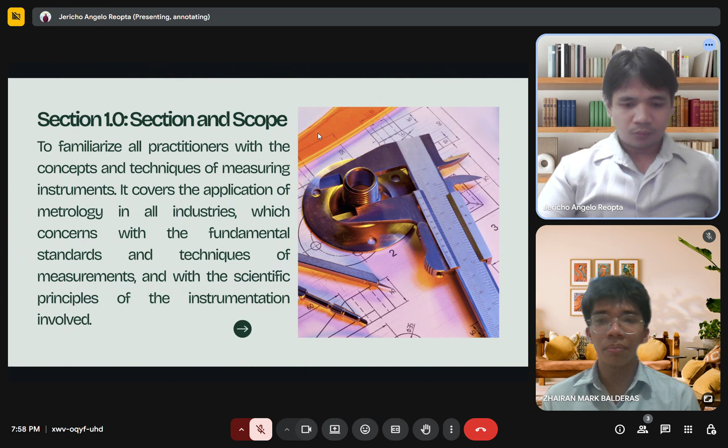First is Section 1, Scope. To familiarize all practitioners with the concept and techniques of measuring instruments, it covers the application of metrology in all industries concerned with the fundamental standards and techniques of measurements and with the scientific principles of the instrumentation involved.

Section 2, Definitions. Correctness or accuracy: the degree of conformity of a measured or calculated value to some recognized standard or specified value. The difference between the measured and true value is the error of the measurement.

Precision is the repeatability of the measuring process, or how well identically performed measurements agree. This concept applies to a set of measurements.

Tolerance or allowance. Tolerance is the amount of variation permitted in the part, or the total variation allowed in a given dimension, while allowance is the minimum clearance space intended between mating parts and represents the condition of the tightest possible fit.

Standard: something that is set up and established by authority as a rule for the measure of a quantity, weight, extent, value, or quality.

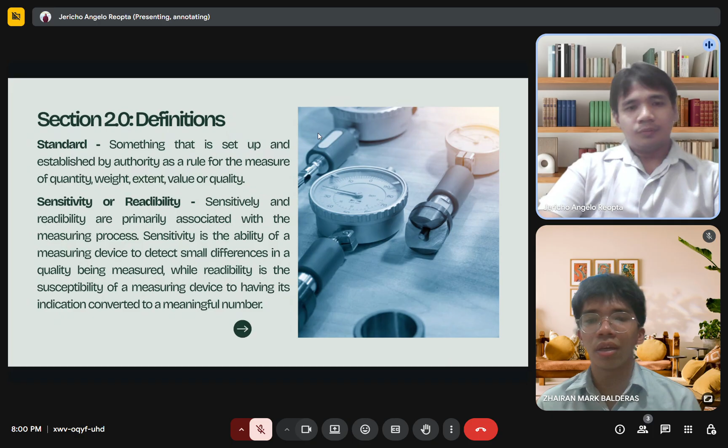Sensitivity or readability. Sensitivity and readability are primarily associated with the measuring process. Sensitivity is the ability of a measuring device to detect small differences in a quantity being measured, while readability is the susceptibility of a measuring device to have its indication converted to a meaningful measured number.

Section 3, Measurement Concepts. The International System of Units, or the SI standard unit, the Conference Generale des Poids et Mesures,

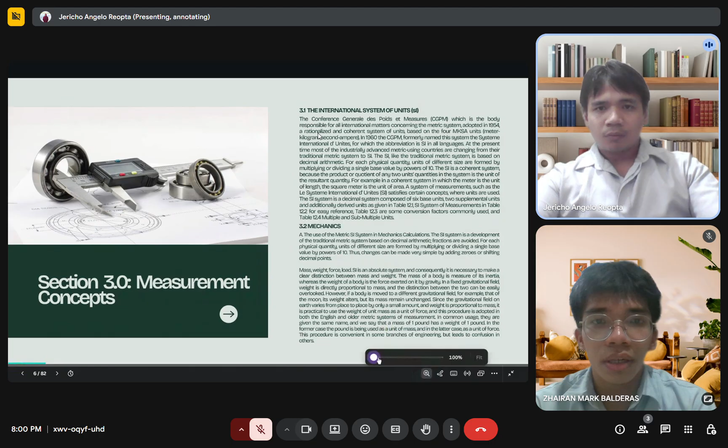or CGPM, is the body responsible for all international matters concerning the metric system. It adopted in 1954 a rationalized and coherent system of units based on the 4 MKSA units: meter, kilogram, second, ampere.

In 1960, the CGPM formally named this system the System International of Units, for which the abbreviation is SI in all languages. At present, most industrially advanced metric-using countries are changing from their traditional metric system to SI.

The SI, like the traditional metric system, is based on decimal arithmetic. For each physical quantity, units of different size are formed by multiplying or dividing the single base value by powers of 10. The SI is a coherent system because the product or quotient of any two unit quantities in the system

is the unit of the resultant quantity. For example, in a coherent system in which the meter is the unit of length, the square meter is the unit of area.

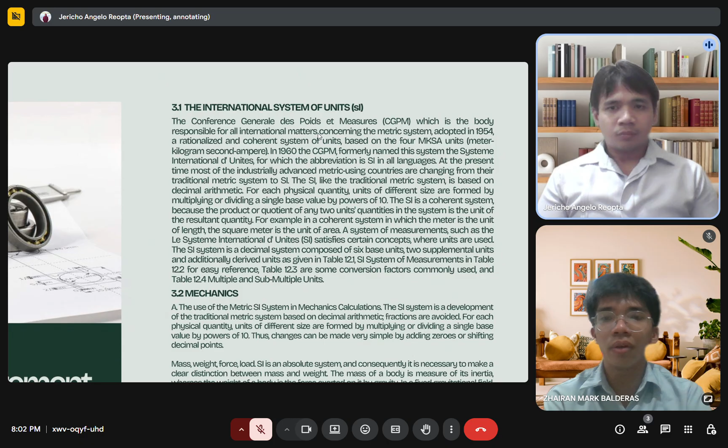In Table 12.2, for easy reference, Table 12.3 shows some conversion factors commonly used, and Table 12.4 shows multiple and sub-multiple units.

Mechanics: the use of the metric SI system in mechanics calculations. The SI system is developed from the traditional metric system based on decimal arithmetic.

Fractions are avoided. For each physical quantity, units of different size are formed by multiplying or dividing a single base value by powers of 10. Thus, changes can be made very simply by adding zeros or shifting decimal points.

Mass, weight, force, load: SI is an absolute system, and consequently it is necessary to make a clear distinction between mass and weight. The mass of a body is a measure of its inertia, whereas the weight of a body is the force exerted on it by gravity.

In a fixed gravitational field, however, if a body is moved to a different gravitational field, for example that of the moon, its weight alters but its mass must remain unchanged.

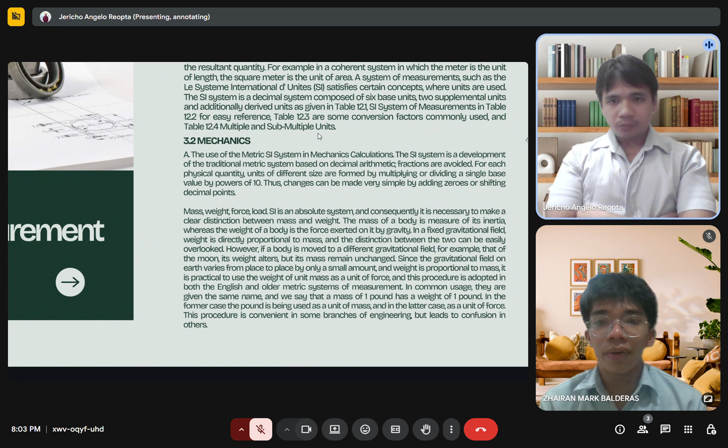Since the gravitational field on Earth varies from place to place by only a small amount, and weight is proportional to mass, it is practical to use the weight of unit mass as a unit of force.

This procedure is adopted in both the English and older metric systems of measurement. In common usage, they are given the same name, and we say the mass of 1 pound has a weight of 1 pound. In the former case, the pound is used as a unit of mass, and in the latter case as a unit of force.

This procedure is convenient in some branches of engineering but leads to confusion in others.

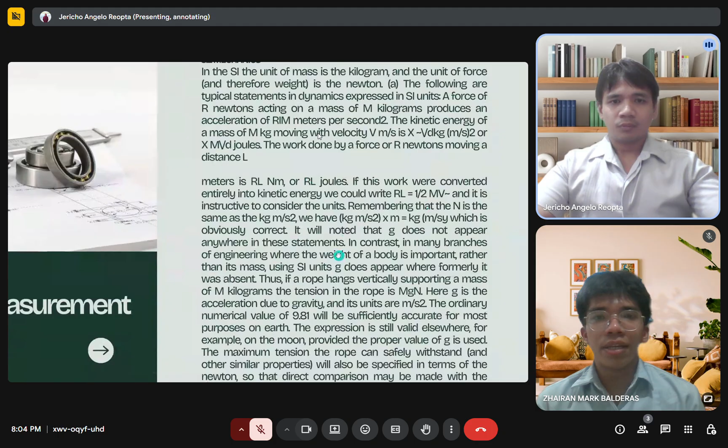In the SI, the unit of mass is the kilogram and the unit of force, and therefore weight, is the newton. The following are typical statements in dynamics expressed in SI units. A force of R newtons acting on a mass of m kilograms produces an acceleration of R/m meters per second squared. The kinetic energy of a mass of m kilograms moving with velocity v meters per second is 1/2 mv² kilogram square meters per second squared, or 1/2 mv² joules.

The work done by a force of R newtons moving through a distance L meters is RL newton meters, or RL joules. If this work were converted entirely into kinetic energy, we would write RL = 1/2 mv², and it is instructive to consider the units, remembering that the N is the same as kilogram meter per second squared. We have kilogram meter per second squared multiplied by meters equal to kilogram multiplied by meters squared over seconds squared, which is obviously correct.

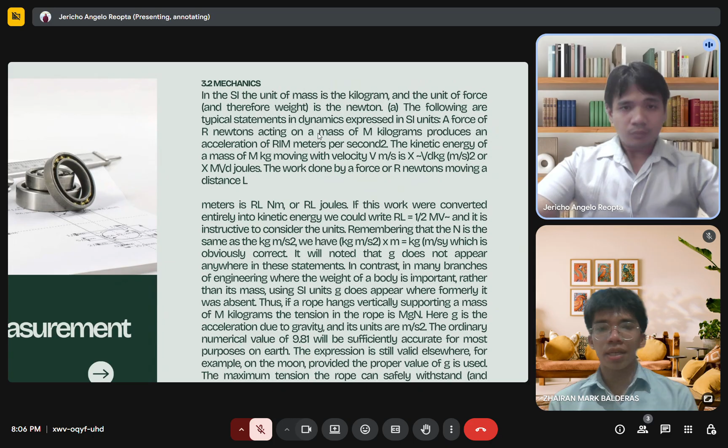It will be noted that g does not appear anywhere in this statement. In contrast, in many branches of engineering where the weight of a body is important rather than its mass, using SI units, g does appear where formerly it was absent. Thus, if a rope hangs vertically supporting a mass of m kilograms, the tension in the rope is mg newtons, where g is the acceleration due to gravity and its units are meters per second squared. Ordinarily the numerical value of 9.81 will be sufficient for most purposes.

The expression is still valid elsewhere, for example on the moon, provided the proper value of g is used. The maximum tension the rope can safely withstand, and other similar properties, will also be specified in terms of the newton, so that direct comparison may be made with the tension predicted. Next.

Pressure and stress: these quantities are expressed in terms of force per unit area. In the SI, the unit is based on the newton per square meter. Similarly, data used in strength of materials calculations, Young's modulus of elasticity, yield strength, and so on, are all expressed in terms of the newton. It has been recommended by the International Standards Organization that the special name be the pascal. This recommendation is subject to approval by the CGPM. The basic unit is the newton per square meter. It's very small; it is only 0.15 multiplied by 10⁻³ pound per square inch.

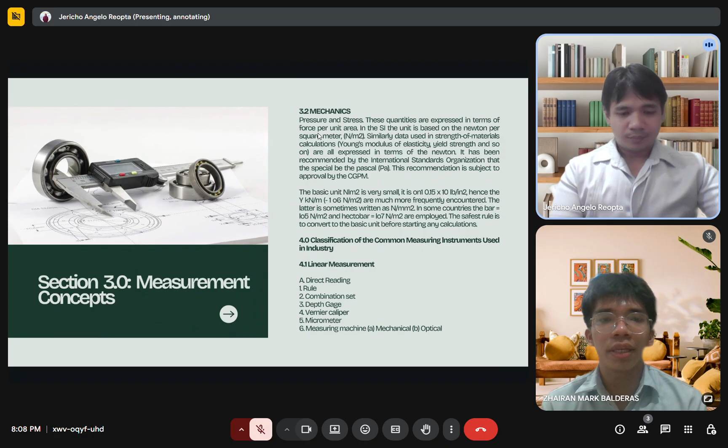Hence, the kilonewton per square meter and meganewton per square meter are much more frequently encountered, the latter sometimes written as newton per square millimeter. In some countries, the bar, 10⁵ newtons per square meter, and hectobar, 10⁷ newtons per square meter, are employed. The safest rule is to convert to the basic unit before starting any calculations.

4.0 Classifications of the common measuring instruments used in the industry. The first one is linear measurement, direct reading: 1 is the rule, 2 is the combination set, 3 is the depth gauge, 4 is the vernier caliper, 5 is the micrometer, and lastly, the measuring machine, mechanical and optical.

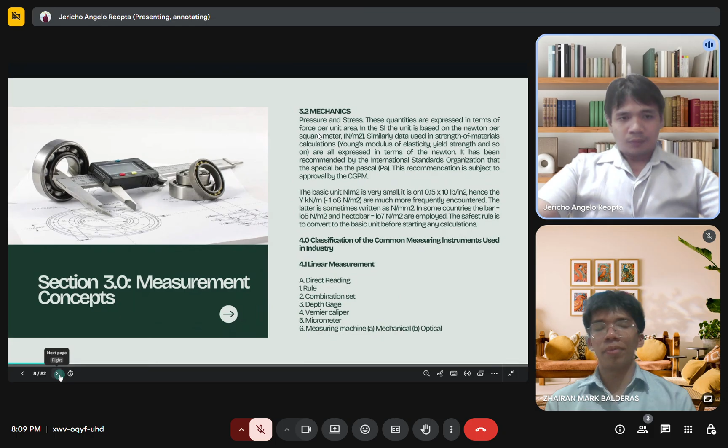Section 5, the graduated manual measuring tools. Rules: the most generally used graduated measuring instrument in the industrial metrology field for approximately determining linear dimensions, which are made with various dimensions and accuracies. Rules shall be manufactured of carbon steel or stainless steel. Shrink rules are commonly employed in the pattern making trade where the casting of metals is involved, and automatically take into consideration the shrink allowances of the materials being cast.

Hook rule, frequently used to assure the user that the end of the workpiece is flush with the end of the rule. Tapered rules are used in measuring the inside of small holes, narrow slots, and grooves. Next is the calipers. Slide calipers consist of a stationary jaw integral with the graduated beam on which the movable jaw slides, with reference points for inside and outside readings. Next one is the vernier calipers, a measuring instrument which can be used for taking both inside and outside, and dial calipers, direct reading calipers which are accurate up to the thousandth of a centimeter.

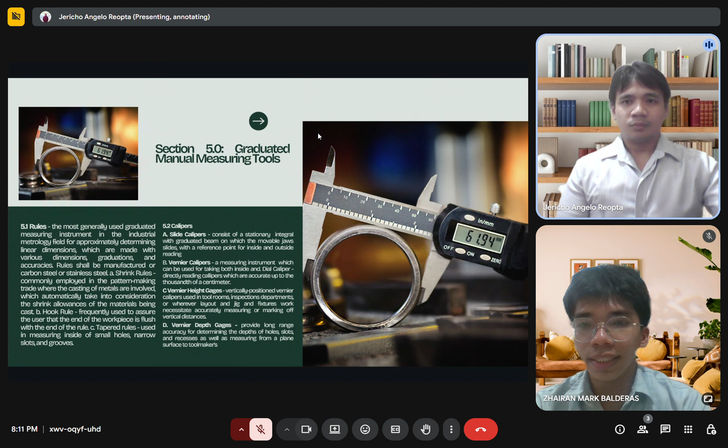The next one is the vernier height gauge: vertically positioned vernier calipers used in tool rooms, inspection departments, or where layout and jig and fixture work necessitate accurately measuring or marking vertical distances. Next is the vernier depth gauge, which provides long-range accuracy for determining the depth of holes, slots, and recesses, as well as measuring from a plane surface, for toolmakers. Next.

Gear tooth vernier calipers are used to check the pitch line thickness of gear teeth by measuring the tooth chord at the specific distance, the chordal addendum, from the top of the gear tooth.

The gauge consists of two independently actuated vernier calipers, each having its own movable slide, but the beams and the stationary jaw are made of a common single piece. One of the slides has the form of a blade called the tongue of the instrument, which contacts the top of the gear tooth. By moving this slide, the gauge can be adjusted to operate at the desired addendum distance. The second slide, integral with the movable jaw, carries out the actual chordal thickness measurement at the pitch line.

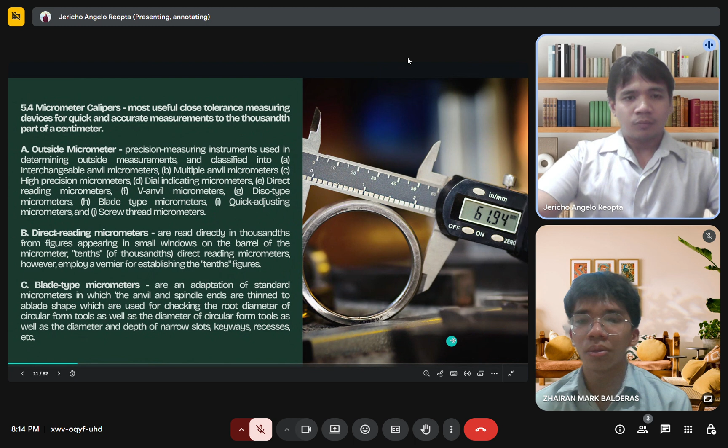Direct reading micrometers are read directly in thousandths from figures appearing in a small window on the barrel of the micrometer. Ten-thousandths direct reading micrometers, however, employ a vernier for establishing the tenths figures. The next one is the blade type micrometers. These are an adaptation of standard micrometers in which the anvil and spindle ends are thinned to a blade shape, which are used for checking the root diameter of circular form tools as well as the diameter and depth of narrow slots, keyways, recesses, etc.

Next is the quick adjusting micrometers that allow the spindle to be slid quickly to any point within their range, which makes them particularly efficient thousandth reading micrometers for checking work where a variety of dimensions are involved. Next is the screw thread micrometers. Screw thread micrometers are designed to read the pitch diameter of screws to thousandth accuracy by the use of a pointed spindle and double V anvil, which are available for varying diameters of work, and each size normally covers a range of threads per centimeter.

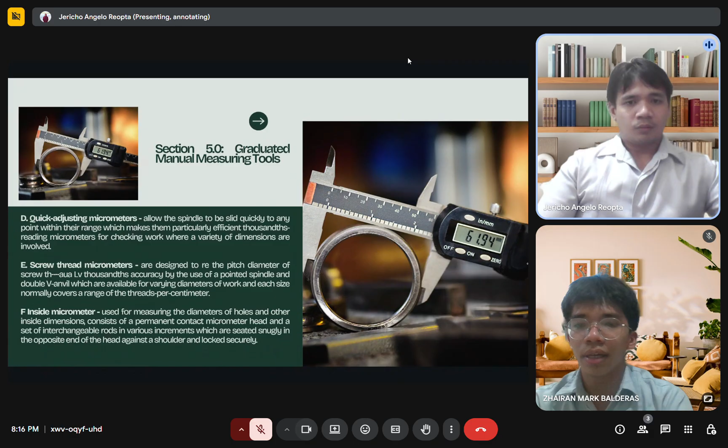Next is the inside micrometer, used for measuring the diameters of holes and other inside dimensions. It consists of a permanent contact micrometer head and a set of interchangeable rods in various increments, which are seated snugly in the opposite end of the head against a shoulder and locked securely. Next,

the protractor consists of a rectangular head graduated in degrees along a semicircle with a blade pivoted on the center pin. Any angle from 0 to 180 can be set. The combination protractor and depth gauge is a combination of a movable graduated blade depth gauge and a graduated protractor head.

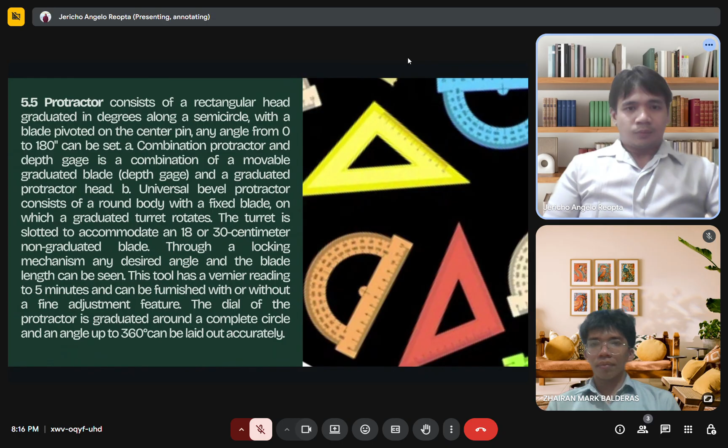The universal bevel protractor consists of a round body with a fixed blade on which a graduated turret rotates. The turret is slotted to accommodate an 18 or 30 centimeter non-graduated blade. Through a locking mechanism, the desired angle and the blade length can be set. This tool has a vernier reading to 5 minutes and can be furnished with or without a fine adjustment feature. The dial of the protractor is graduated around a complete circle, and an angle of 360 can be laid out accurately.

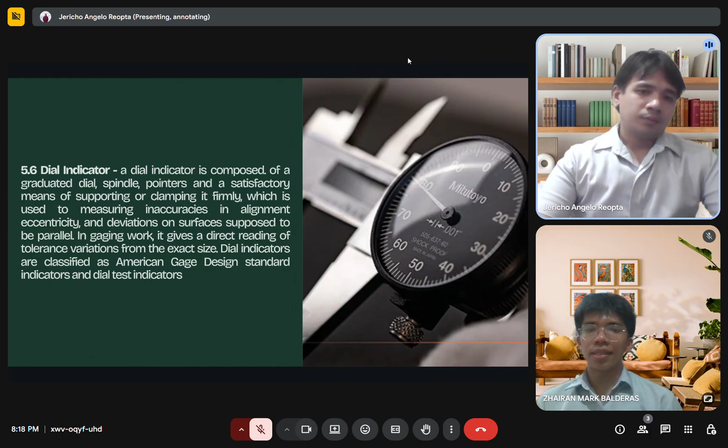The dial indicator. A dial indicator is composed of a graduated dial, spindle, pointers, and a satisfactory means of supporting or clamping it firmly, which is used to measure inaccuracies in alignment, eccentricity, and deviations on surfaces supposed to be parallel. In gaging work, it gives a direct reading of tolerance variations from the exact size. Indicators are classified as American Gauge Design standard indicators and dial test indicators.

The dial test indicators, commonly known as the toolmaker's indicators, are smaller than the smallest AGD standard indicator, and because of their small size and thin tapered body, they can be employed in many places not accessible with other indicators, and are also used as an accessory with many machine tools.

The planimeter or planekator is a tool used for checking the flatness of plane surfaces to ten-thousandths of a centimeter and consists of a diabase straight edge, an adjustable mounting for the straight edge, and a 0.0005 centimeter reading indicator. The straight edge is always in the same reference plane at every position of the surface being checked.

Readings are taken under the straight edge and recorded directly onto a contour chart of the plane being checked. Points of equal height are connected to form visual features. Next.

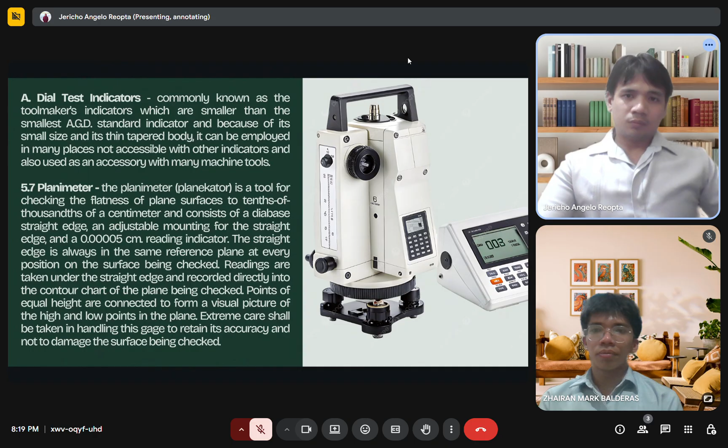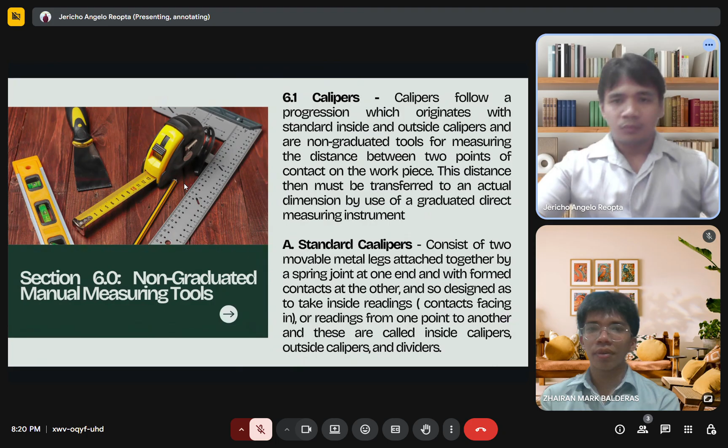Bevels consist of three non-graduated slotted blades with one or two screw and knurled nut connecting them. By loosening the nuts, the blades can be set to varying angles. Trammels, used in sizes beyond the range of dividers, consist of a long bar on which two arms or trammels slide. Next.

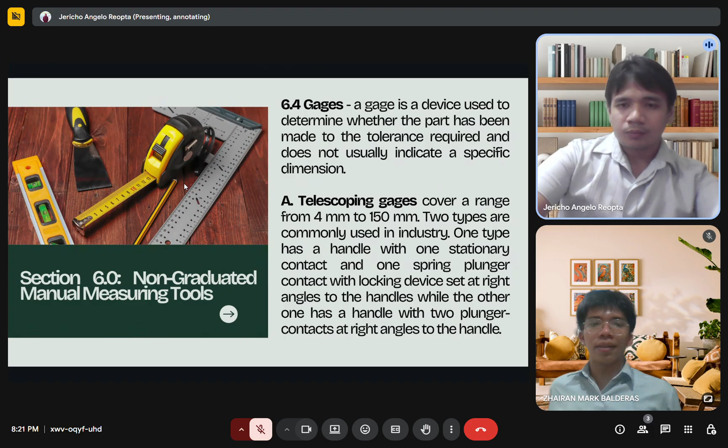Gauges. A gauge is a device used to determine whether the part has been made to the tolerance required. Telescoping gauges cover a range from 4 millimeter to 150 millimeter. Two types are commonly used in industry. One type has a handle with one stationary contact and one spring plunger contact with locking device set at right angles to the handle, while the other one has a handle with two plunger contacts at right angles to the handle.

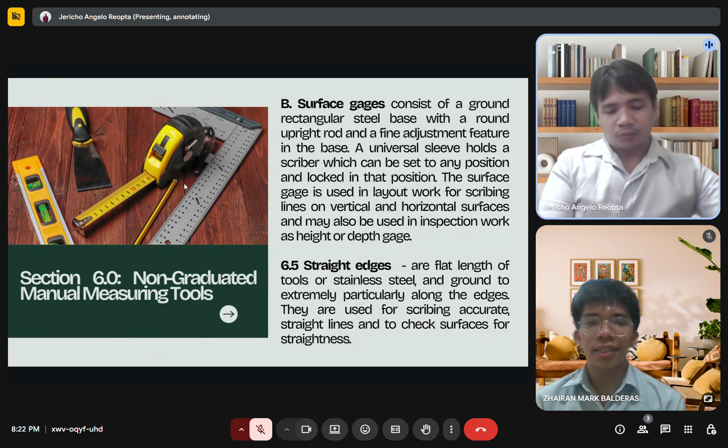Surface gauges consist of a ground rectangular steel base with round upright rod and fine adjustment feature in the base. Straight edges are flat lengths of tool or stainless steel and ground to extreme accuracy along the edges. They are used for scribing accurate straight lines and checking surfaces for straightness. Next.

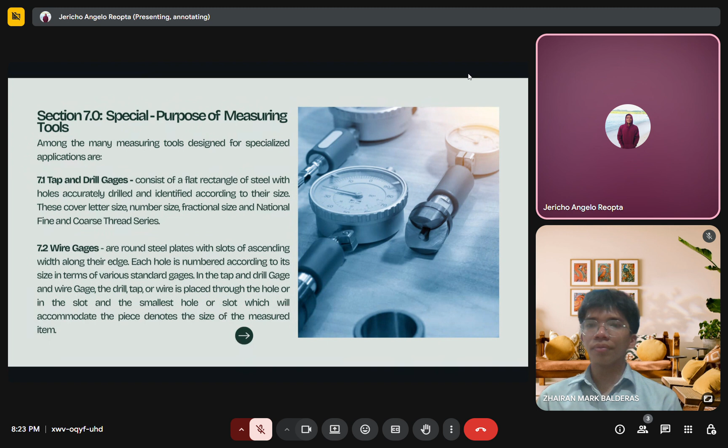Section 7, the special purpose measuring tools. Among the many measuring tools designed for specialized applications are tap and drill gauges, consisting of a flat rectangle of steel with holes accurately drilled and identified according to their size. Wire gauges are round steel plates with slots of ascending widths along their edge. Next.

Screw pitch gauges consist of a metal case containing many separate leaves. Radius gauges are individual leaves or sets of leaves in a case and are designed to check both convex and concave radii. Thickness feeler gauge consists of a number of thin blade leaves of different thickness and is used in checking clearances, backlash in gears, and for gauging in narrow places.

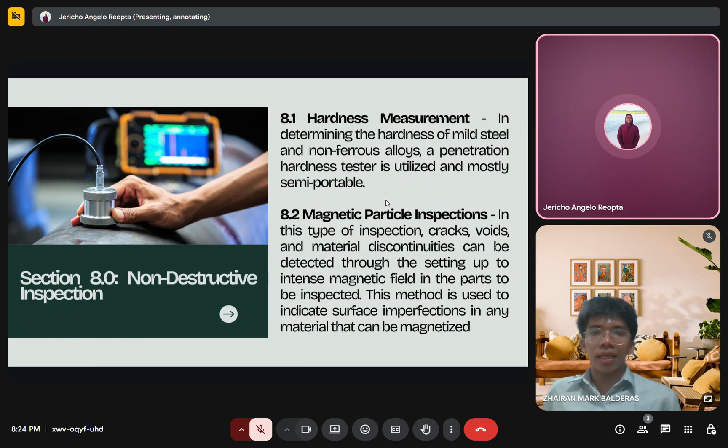Section 8. Non-destructive inspection. Hardness measurement: in determining the hardness of mild steel and non-ferrous alloys, a penetration hardness tester is utilized, mostly semi-portable. Magnetic particle inspection: in this type of inspection, cracks, voids, and material discontinuities can be detected through the setting up of an intense magnetic field in the parts to be inspected. Next.

Radiographic inspection. This is accomplished by exposing a part to either X-rays, gamma rays, or radiation from radioisotopes, and viewing the image created by the radiation on the fluoroscope or film. Fluorescent penetrants. These are used to find surface defects in almost any material.

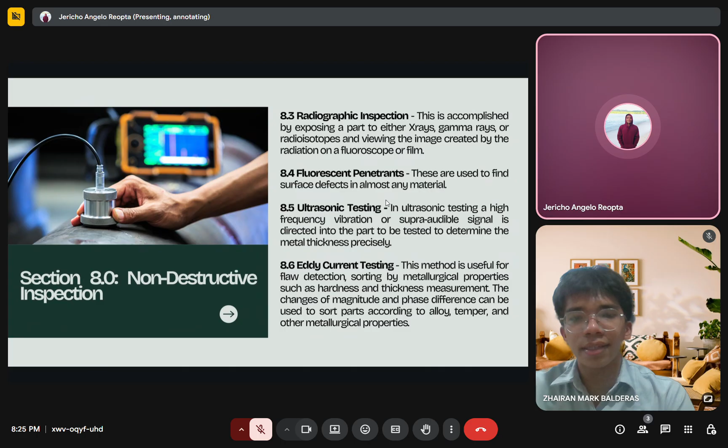Ultrasonic testing. In ultrasonic testing, a high-frequency vibration or supra-audible signal is directed into the part to be tested to determine the metal thickness precisely. Eddy current testing. This method is used for flaw detection, sorting by metallurgical properties such as hardness, and thickness measurement. Next.

Section 9. Pressure and vacuum measurement. In industrial application, pressure is normally measured by means of indicating gauges or recorders, which are classified as the mechanical, electromechanical, electrical, or electronic types.

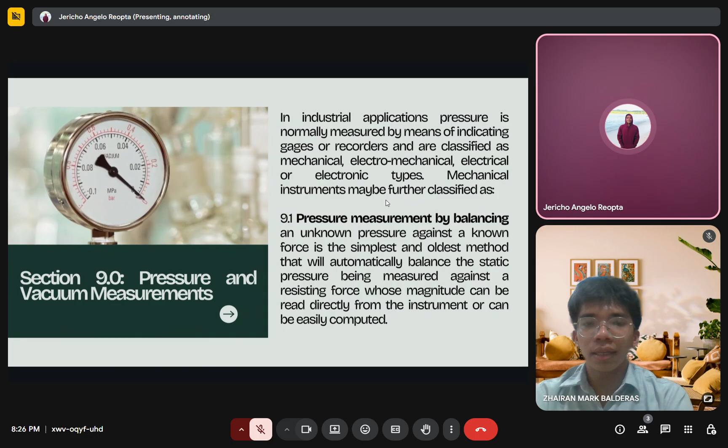Mechanical instruments may be further classified. Pressure measurement by balancing an unknown pressure against a known force is the simplest and oldest method that will automatically balance the static pressure being measured against a resisting force whose magnitude can be read directly from an instrument or can be easily computed.

The liquid column gauges. The liquid column gauges used mostly in industry are some type of either U-type or well-type manometer. Limp diaphragm gauges are used for measuring low pressure in boiler houses and in other applications where low pressures must be accurately measured.

Bell-type gauges are designed for measuring low pressures. This type of gauge utilizes the large area of a liquid-sealed bell chamber to provide the force necessary to actuate an indicating or recording mechanism and can be made sensitive to the smallest change of pressure likely to be significant in an industrial application and yet rugged enough to endure considerable mistreatment.

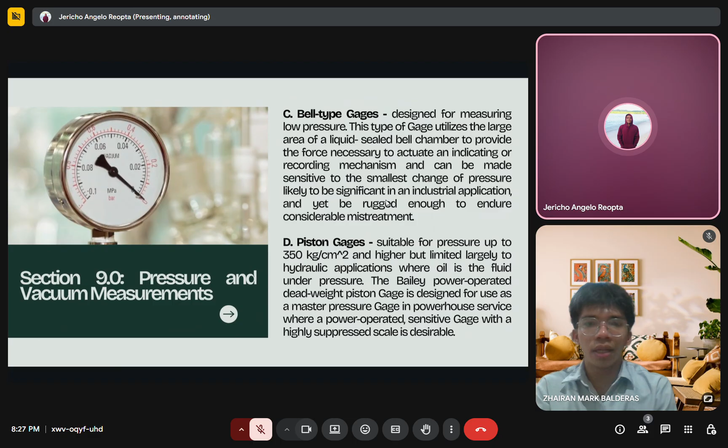Piston gauges are suitable for pressures up to 350 kg per square centimeter and higher but limited largely to hydraulic applications where oil is the fluid under pressure. Next.

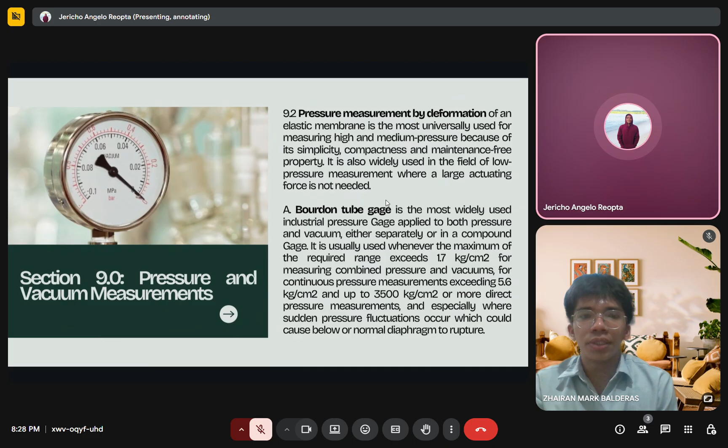Pressure measurement by the deformation of an elastic membrane is the most universally used for measuring high and medium pressure because of its simplicity, compactness, and maintenance-free property. The Bourdon tube gauge is the most widely used industrial pressure gauge, applied to both pressure and vacuum, either separately or in a compound gauge.

Helical type of pressure gauge: variations of the simple Bourdon type of pressure gauge wherein the element or tube is wound in the form of a spiral having 4 or 5 turns. Bell type gauge, designed for measuring low pressure. This type of gauge utilizes the large area of a liquid sealed bell chamber to provide the force necessary to actuate an indicating or recording mechanism and can be made sensitive to the smallest change of pressure likely to be significant in an industrial application.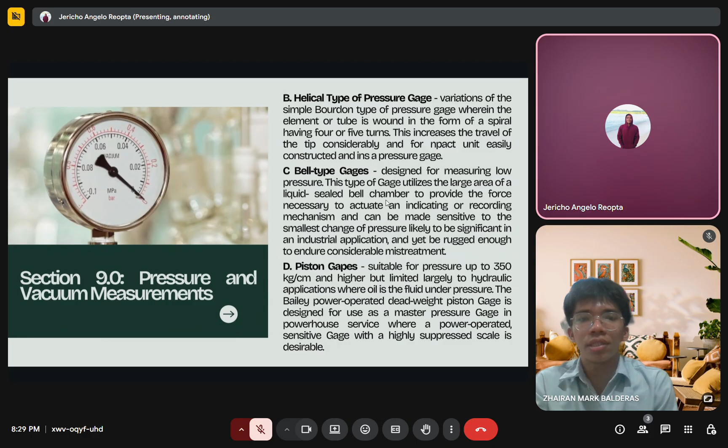Piston gauge, suitable for pressure up to 350 kilograms per square centimeter and higher but limited largely to hydraulic applications where oil is the fluid under pressure. Next. Sector gear arrangement has a large sector gear mounted at right angles to a link connecting the sector gear arm and Bourdon type tube tip movement. Cam and roller arrangement employs a cam sector and a helicoid roller to which a pointer is attached. Next.

Electromechanical pressure instruments usually employ a mechanical means for detecting the pressure and an electrical means for indicating or recording the detected pressure. Electronic pressure measuring instruments normally depend on some physical change that can be detected and indicated or recorded electronically. Vacuum gauges: mechanical, electrical, and electronic.

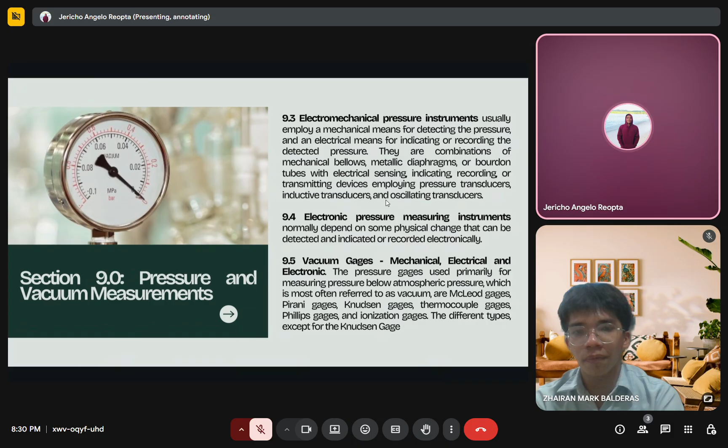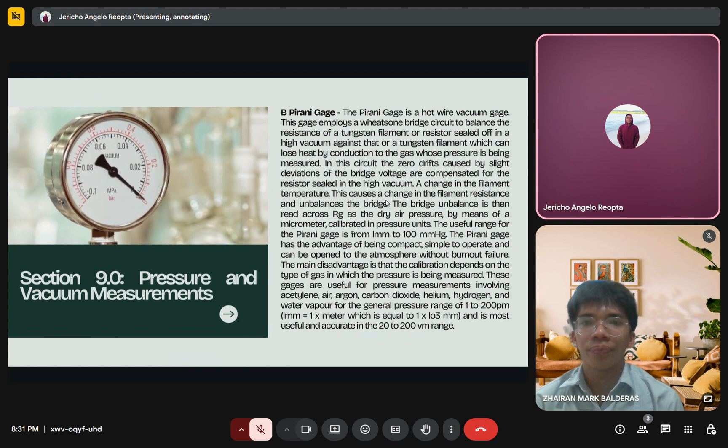The pressure gauges used primarily for measuring pressure below atmospheric pressure, which is most often referred to as a vacuum, are McLeod gauges, Pirani gauges, Knudsen gauges, thermocouple gauges, Phillips gauges, and ionization gauges. McLeod gauge: the McLeod gauge is a mercury gauge for measurement of absolute pressure. The Pirani gauge: the Pirani is a hot wire vacuum gauge. This gauge employs a Wheatstone bridge to balance the resistance of a tungsten filament or resistor sealed in a high vacuum against that of a tungsten filament which can lose heat by conduction to the gas whose pressure is being measured.

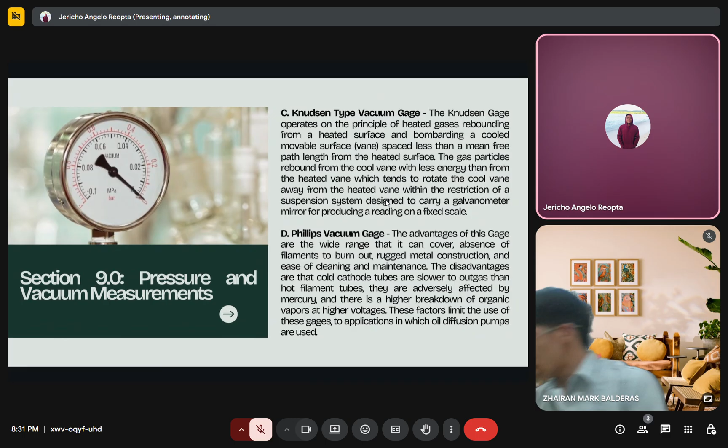Knudsen type vacuum gauge: the Knudsen gauge operates on the principle of heated gas rebounding from a heated surface and bombarding a cooled movable surface vane spaced less than a mean free path length from the heated surface. Phillips vacuum gauge: the advantages of this gauge are the wide range that can be covered, absence of filaments to burn out, rugged metal construction, and ease of cleaning and maintenance. Vacuum gauge calibration: the majority of industrial vacuum applications do not require the ultimate in vacuum calibration techniques. Where calibration is needed for very high vacuum measuring gauges, a calibrated precision ionization gauge should be used as the standard.

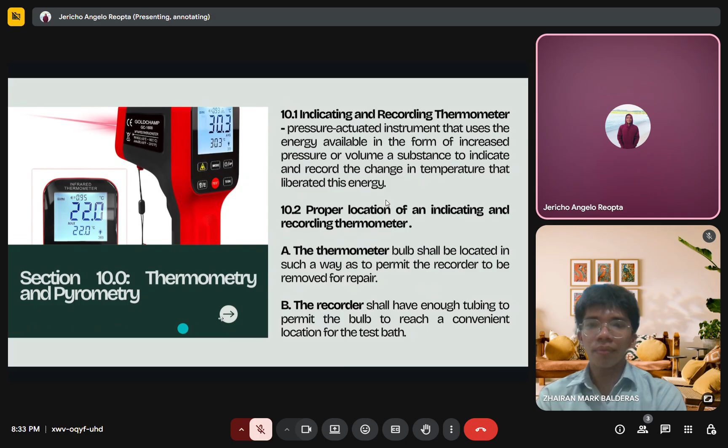Section 10, Thermometry and Pyrometry: indicating and recording thermometer, a pressure-actuated instrument that uses the energy available in the form of increased pressure or volume of a substance to indicate or record the change in temperature that liberated this energy. Proper location of an indicating and recording thermometer: first, the thermometer bulb shall be located in such a way as to permit the recorder to be removed for repair. The recorder shall have enough tubing to permit the bulb to reach a convenient location for the test bath.

The thermometer tubing shall be properly fastened and out of the way of damage from operators, mechanics, and pipe fitters who may have occasion to work near the installation. The angle of the tube at the neck of the bulb shall be protected. The tubing shall never be in contact with hot steam pipes or stacks, which would increase the chance of ambient temperature errors. The locations of bimetallic recording thermometers shall be carefully checked for dirt and dust in the air.

Yan. The next part is to be discussed with Reopta.

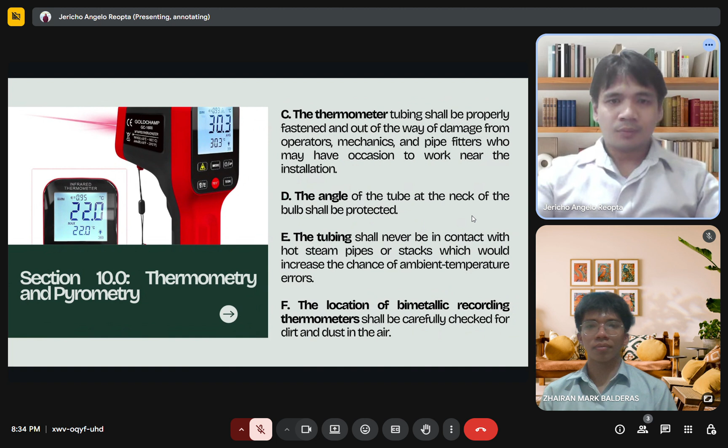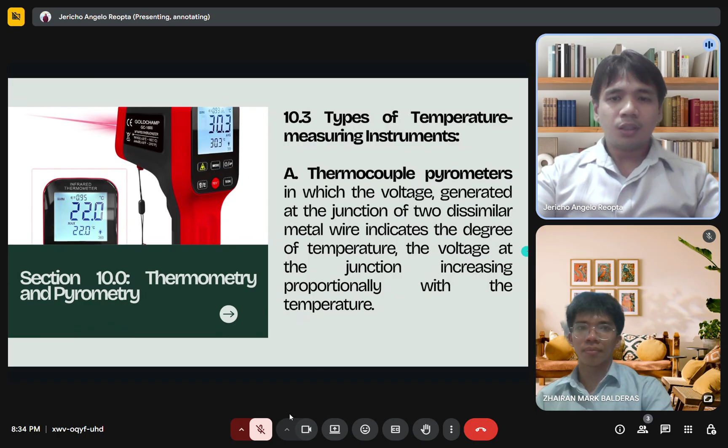Next is thermocouple pyrometers, in which the voltage generated at the junction of two dissimilar metal wires indicates the degree of temperature. The voltage at the junction increases proportionally with the temperature. Specifications in the selection of thermocouple materials: A. Thermocouple wires shall be chosen in such a way that they produce a large electromotive force that varies linearly with the temperature. B. They shall be corrosion and oxidation resistant in the atmosphere and temperature range where they shall be used. C. They shall be resistant to change in characteristics that shall affect their calibration.

D. They shall be free from parasitic currents. E. Required readings shall be reproducible within the accuracy limits. And F. They shall be physically strong enough to withstand high temperature and rapid temperature changes.

Temperature limitations in the selection of thermocouple materials. A. Copper constantan, commonly used in the -185 to 300 degrees Celsius temperature range and superior for measurement of relatively low temperatures, especially sub-zero temperatures; they stand up well against corrosion and are reproducible to a high degree of precision.

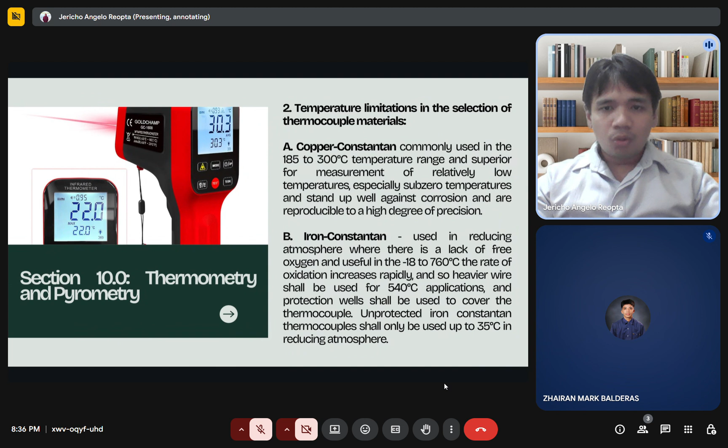B. Iron constantan, used in reducing atmospheres where there is a lack of free oxygen and useful in the -18 to 760 degrees C range. The rate of oxidation increases rapidly, so heavier wire shall be used for 540 degrees C applications, and protection wells shall be used to cover the thermocouple.

C. Chromel alumel shall be used extensively in oxidizing atmospheres where there is an excess of free oxygen, and can be used to measure temperatures up to 1,320 degrees Celsius but is most satisfactory at temperatures up to 1,150 degrees Celsius for constant service. Reducing atmospheres have a tendency to change the thermoelectric characteristics of these materials and reduce their accuracy.

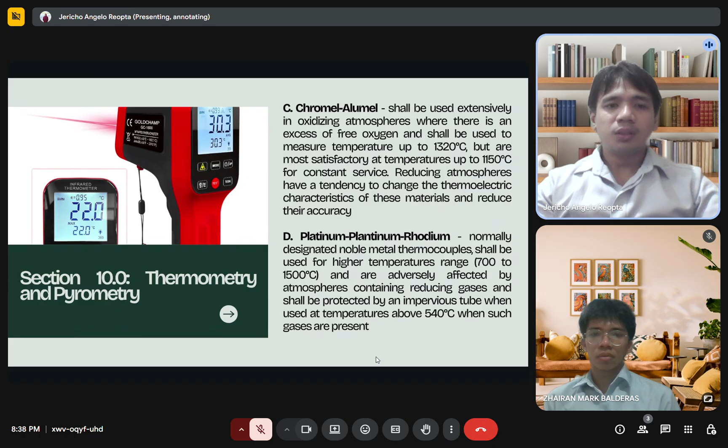D. Platinum-platinum-rhodium, normally designated noble metal thermocouples, shall be used for higher temperatures, range 700 to 1,500 degrees Celsius. They are adversely affected by atmospheres containing reducing gases and shall be protected by an impervious tube when used at temperatures above 540 degrees C when such gases are present.

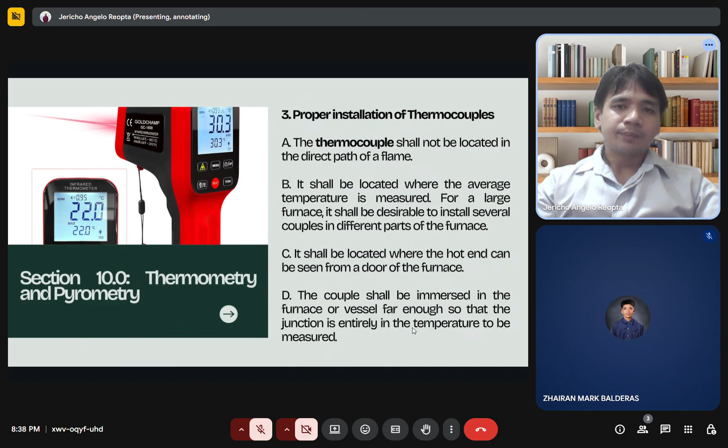Proper installation of thermocouples. A. A thermocouple shall not be located in the direct path of a flame. B. It shall be located where the average temperature is measured. For a large furnace, it is desirable to install several couples in different parts of the furnace. It shall be located where the hot end can be seen from a door of the furnace. The couple shall be immersed in the furnace or vessel far enough so that the junction is entirely in the temperature to be measured.

Where there is danger of the couple fusing from the high temperature, it shall be partially immersed in order to keep it cool. If the thermocouple is mounted horizontally and the temperature is above the softening point of the tube, a support shall be provided to prevent sagging. The couple shall be installed in a pocket to prevent damage from material in the furnace. If a porcelain protecting tube is used, care shall be taken to bring the furnace up to temperature slowly in order to prevent cracking the tube. A porcelain tube shall never be inserted in a hot furnace.

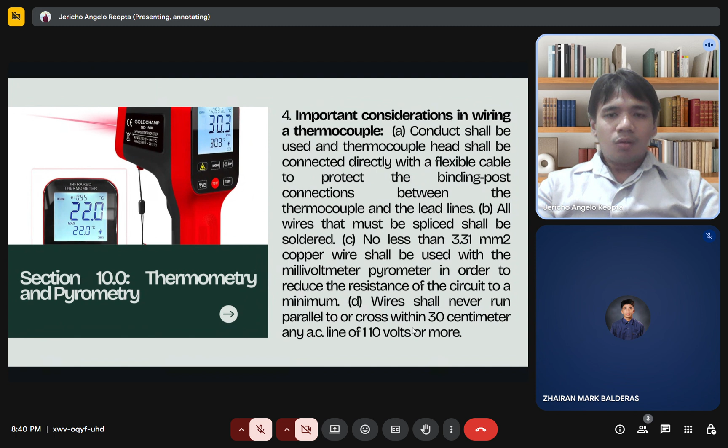Important considerations in wiring a thermocouple. Conduit shall be used and the thermocouple head shall be connected directly with a flexible cable to protect the binding post connection between the thermocouple and the lead lines. All wires that must be spliced shall be soldered, no less than 3.31 square millimeters. Copper wire shall be used with the millivoltmeter pyrometer in order to reduce the resistance of the circuit to a minimum. Wire shall never run parallel to or cross within 30 centimeters of any AC line of 110 volts or more.

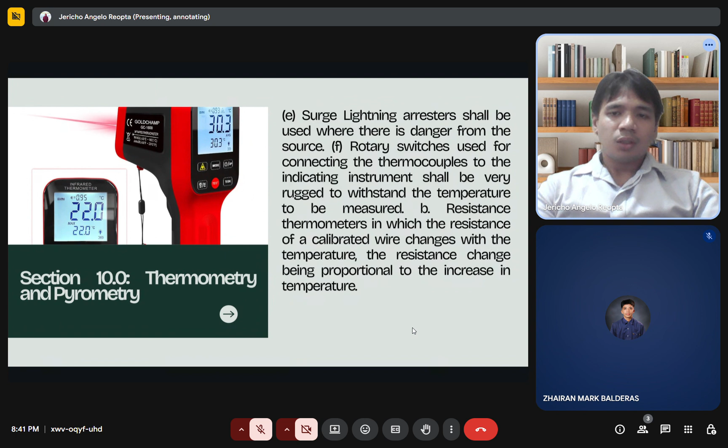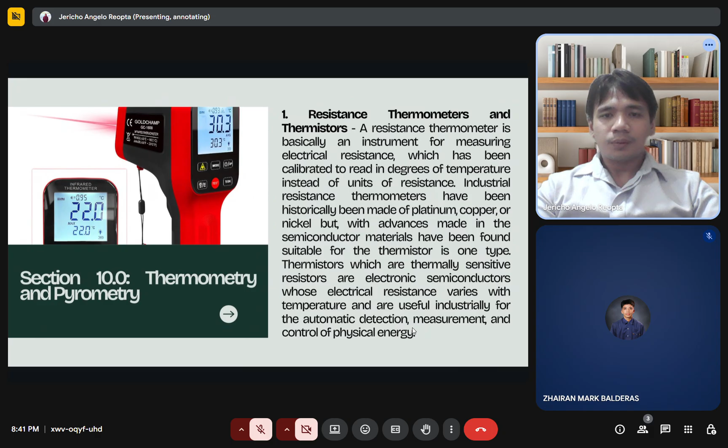Surge lightning arresters shall be used where there is a danger from the source. Rotary switches used for connecting the thermocouples to the indicating instrument shall be very rugged to withstand the temperature to be measured. Resistance thermometers, in which the resistance of a calibrated wire changes with the temperature, the resistance changes being proportional to the increase in temperature. Resistance thermometers and thermistors. A resistance thermometer is basically an instrument for measuring electrical resistance which has been calibrated to read in degrees of temperature instead of units of resistance.

Characteristics of resistance thermometers or thermistors. Frames where coils of wire are wound shall be insulated by materials capable of withstanding the temperatures for which the thermometer is designed. To obtain the highest sensitivity of measurement, the material shall have the greatest resistance change per degree for a given value of resistance, but it shall have good stability over a long period of time and over a wide range of temperatures without changing its electrical characteristics. Metals to be used shall have a high degree of linearity over the resistance temperature range for which the thermometer is designed. Resistance thermometers shall be used within the -40 to 500 degrees Celsius temperature range. Thermistors shall be used within the -80 to 400 degrees Celsius temperature range.

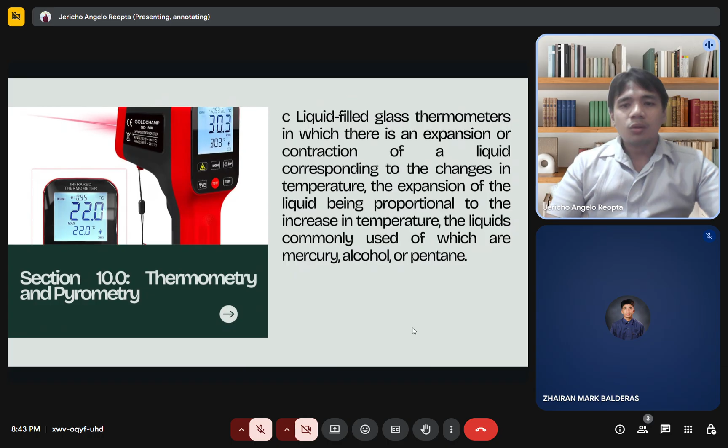Liquid-filled glass thermometers, in which there is an expansion or contraction of a liquid corresponding to the changes in temperature, the expansion of the liquid being proportional to the increase in temperature. The liquids commonly used are mercury, alcohol, or pentane.

Requirements for liquid-filled thermometer liquids.

A. The vapor pressure shall be negligible over the temperature range for which it is to be used. B. The coefficient of cubical expansion shall be high. C. The liquid shall be chemically inactive with respect to the metal in the thermometer system. D. The liquid shall have a low specific gravity, a low specific heat, and a high coefficient of heat conductivity. The liquid shall be incompressible.

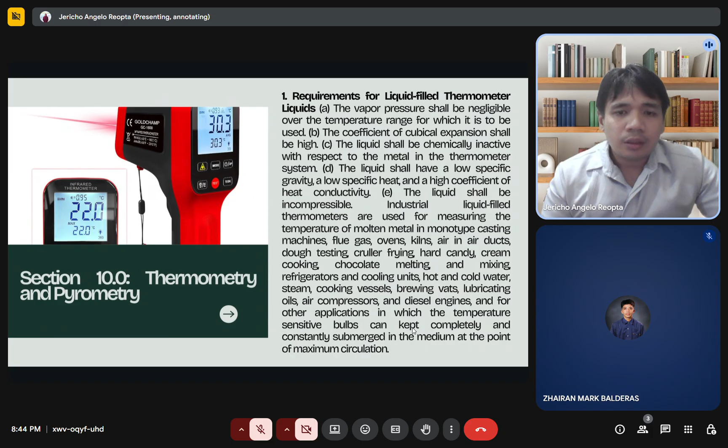Industrial liquid-filled thermometers are used for measuring the temperature of molten metals in monotype casting machines, flue gas ovens, kilns, air ducts, dough testing, cruller frying, hard candy, cream cooking, chocolate melting and mixing, refrigerators and cooling units, hot and cold water, steam, cooking vessels, brewing vats, lubricating oils, air compressors, diesel engines, and other applications in which the temperature-sensitive bulb can be kept completely and constantly submerged in the medium at the point of maximum circulation.

Requirements to obtain the best accuracy with industrial liquid-filled thermometers. A thermometer shall be installed properly so that the temperature-sensitive bulb can reach temperature equilibrium with the surrounding medium.

The temperature-sensitive bulb shall also be properly immersed in the medium to be measured to eliminate the immersion error. The thermometer shall be installed at the point of maximum flow to provide the most rapid heat transfer from the medium under measurement to the bulb.

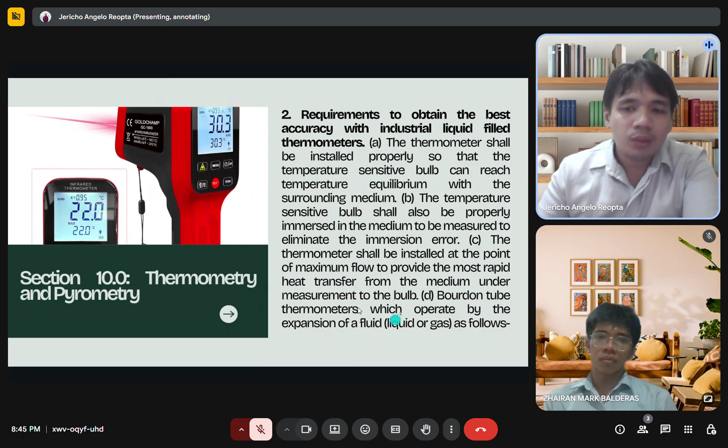D. Bourdon tube thermometers, which operate by the expansion of fluid, liquid, or gas, as follows: expansion of liquid that completely fills the enclosed tubing and bulb of the instrument; expansion of the liquid in the bulb of the instrument; expansion of gas that completely fills the tubing and bulb of the instrument.

Classification of Bourdon tube thermometers. Bourdon tube thermometers are classified according to the kind of fluid with which they are filled. Class 1 are those of the liquid-filled kind, the liquid completely filling the bulb, capillary tube, and the spring that actuates the indicating mechanism of the thermometer, with liquid expansion as the actuating medium. Class 2 are only partly filled with liquid, most of which is in the bulb, while the vapor of the liquid fills the capillary tube and the spring of the indicating device, with vapor pressure as the actuating medium.

Advantages of an optical pyrometer. No direct contact with the object whose temperature is to be measured is required, other than that it be in view.

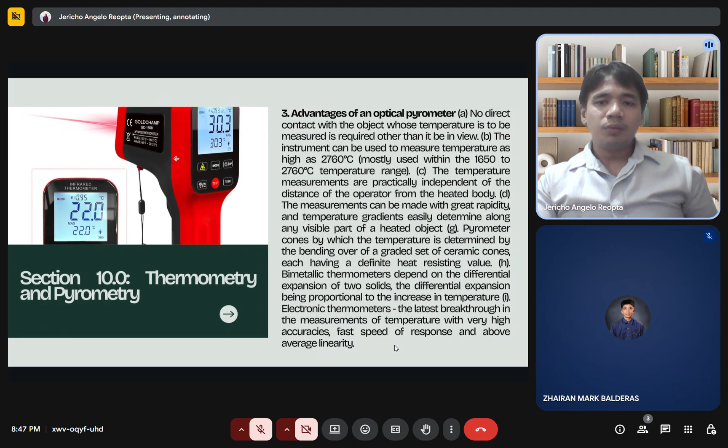Pyrometer cones, by which the temperature is determined by the bending over of a graded set of ceramic cones, each having a definite heat-resisting value.

Next, section 11, flow metering. Inferential type. The inferential type of meter obtains a measurement of the flow of a fluid or gas not by measuring the volume or weight of the medium,

but by measuring some other phenomenon that is a function of the quantity of fluid passing through the pipe, and the phenomenon usually measured is either pressure differential or velocity in the pipe.

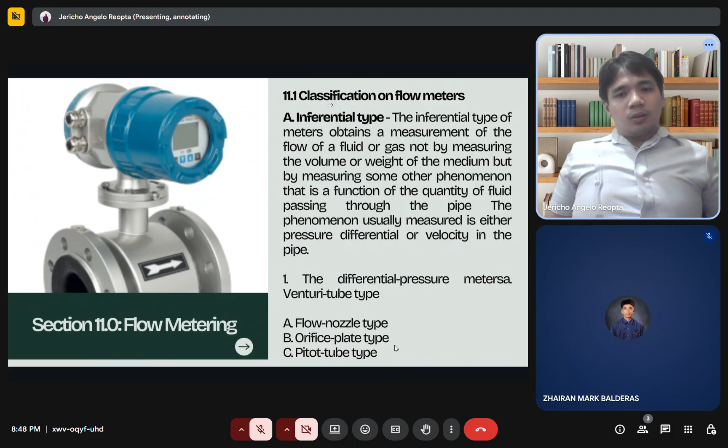The differential pressure meters: A, Venturi tube type; B, flow nozzle type; C, orifice plate type; and Pitot tube type.

Area meters or rotameters. A glass rotameter consists of a tapered glass tube set vertically in the fluid or gaseous piping system, with its large end at the top, and a metering float which is free to move vertically in the tapered glass tube.

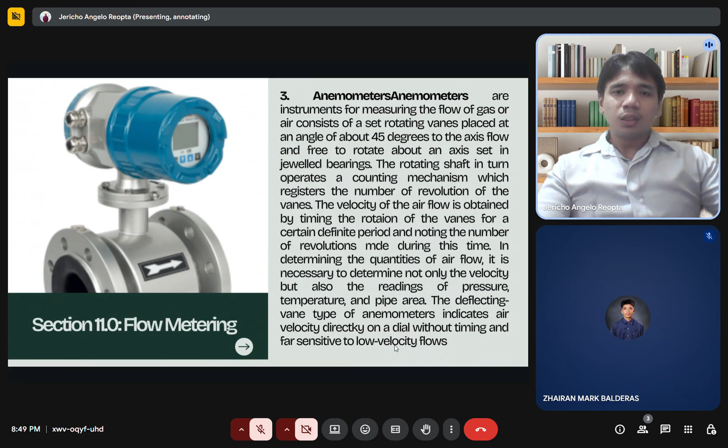Anemometers are instruments for measuring the flow of gas or air, consisting of a set of rotating vanes placed at an angle of about 45 degrees to the axis of flow, free to rotate about an axis set in jewelled bearings.

Electrical meters. Number 1, electrical air conductance meters. By utilizing the ability of gas to conduct heat from a wire or grid heated electrically, it is possible to obtain a quantitative measurement of gas flow through a pipeline or air duct.

Number 2, electromagnetic flow meter, an electrical primary detector of the rate of flow. In this type of flow meter, an electromotive force is induced in the fluid by its motion through a magnetic field provided by the electromagnet. The DC magnetic field acts vertically through the pipe that carries the fluid.

B. Volumetric and current types. Number 1, piston-type volumetric flow meter is used to inject an exact amount of fluid into a flow line or collecting vessel. A, rotating piston pump: a positive displacement flow meter, where the piston is the only moving part of the measuring chamber.

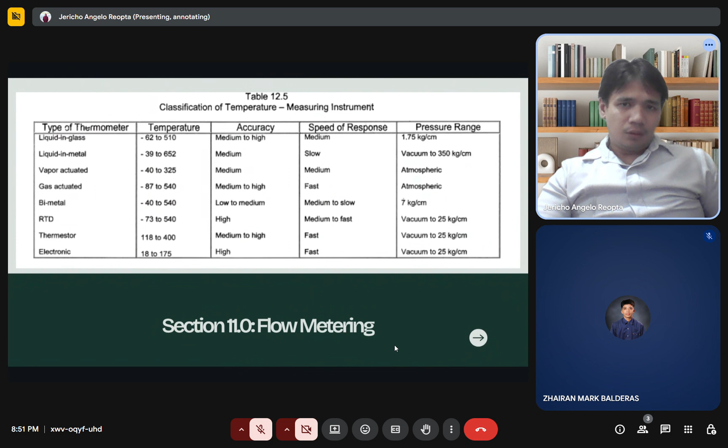Table 12.5, classification of temperature measuring instrument.

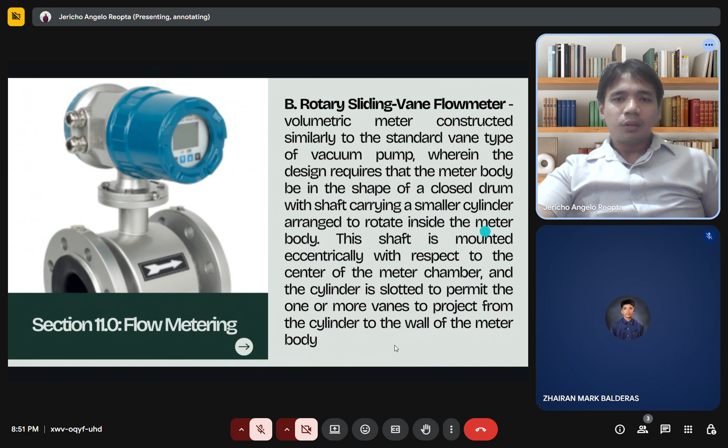Next is the rotary sliding vane flow meter, a volumetric meter constructed similarly to the standard vane type of vacuum pump, wherein the design requires that the meter body be in the shape of a closed drum with a shaft carrying a smaller cylinder arranged to rotate inside the meter body.

Letter C, oscillating piston flow meter. This consists of a hollow piston arranged to oscillate about the center abutment, which is encircled by a confining ring housed in a drum-shaped meter body.

Letter D, rotating bucket flow meter. A positive displacement volumetric meter consisting of a meter with a drum type of body having the outlet and inlet ports side by side with a dividing baffle between them.

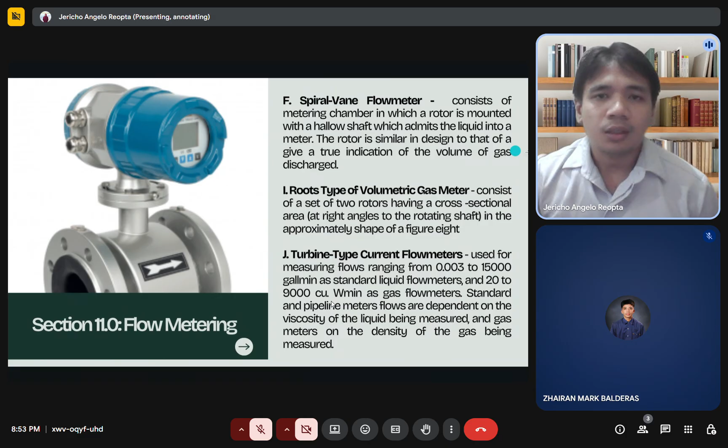Letter E, screw type flow meter consists of 3 mesh screws or rotors mounted vertically and rotating in a measuring chamber. The center or power screw is approximately twice as large in diameter as the 2 idler rotors and has a large thread of special shape designed to seal the meter completely by meshing with the idler rotors and provide maximum meter capacity.

Next, spiral vane flow meter consists of a metering chamber in which a rotor is mounted with a hollow shaft which admits the liquid into the meter.

Roots type volumetric gas meter consists of a set of 2 rotors having a cross-sectional area at right angle to the rotating shaft, in the approximate shape of a figure 8.

Next, turbine type current flow meters used for measuring flows ranging from 0.003 to 1,000, or up to 15,000 gallons per minute as standard liquid flow meters, and 20 to 9,000 cubic feet per minute as gas flow meters.

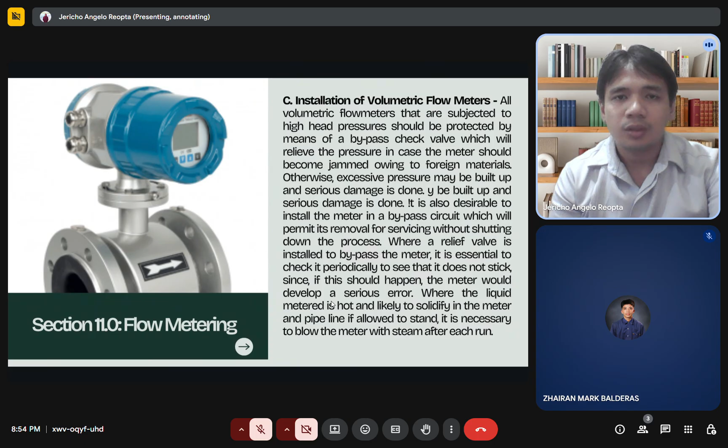Next, installation of volumetric flow meters. All volumetric flow meters that are subjected to high head pressure should be protected by means of a bypass check valve which will relieve the pressure in case the meter should become jammed owing to foreign materials.

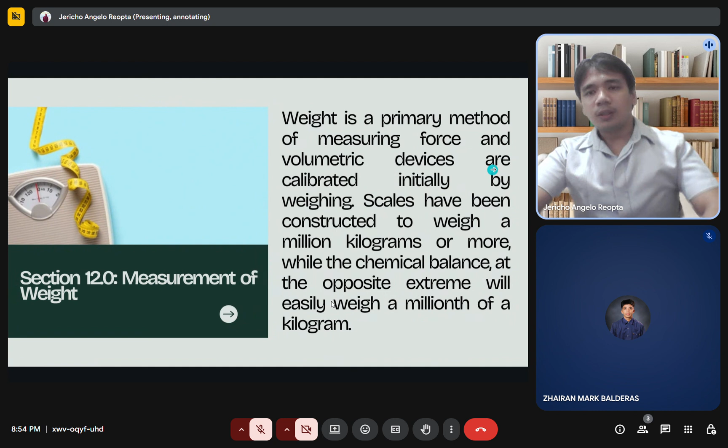Scales have been constructed to weigh 1,000,000 kilograms, while the chemical balance at the opposite extreme can easily weigh one millionth of a kilogram.

12.1, the common platform scale used in the laboratory consists of a compound leverage system.

12.2, pendulum scales give automatic indication over a wide range and are extensively used when speed is important. This type of scale also weighs by balance, but the weights are mounted on bent levers, and the movement of these pendulum levers is magnified and transmitted to pointers that swing in a full circle.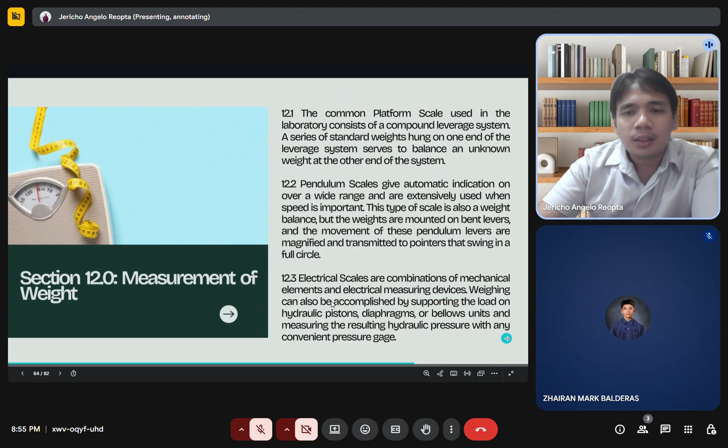12.3, electrical scales are combinations of mechanical elements and electrical measuring devices. Weighing can also be accomplished by supporting the load on hydraulic pistons, diaphragms, or bellows units and measuring the resulting hydraulic pressure with any convenient pressure gauge.

13.1, counter and timer, a common type of revolution counter wherein a rubber or steel tip is applied directly to the shaft center and friction is relied upon to drive the spindle.

Tachometer gives a direct and continuous indication of speed and is therefore most convenient for observing speed variation or fluctuation and for general observation in which a high degree of accuracy is unnecessary.

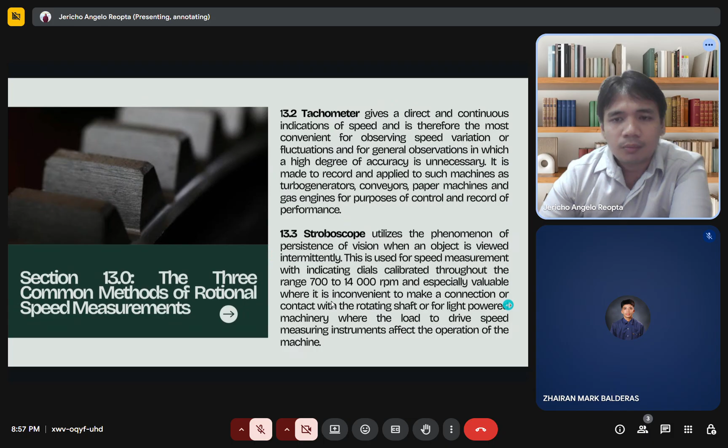Next is the stroboscope, which utilizes the phenomenon of persistence of vision when an object is viewed intermittently. This is used for speed measurement with indicating dials calibrated throughout the range of 700 to 14,000 RPM, and is especially valuable where it is inconvenient to make a common connection or contact with a rotating shaft or for light-powered machinery.

Section 14, Environmental and Pollution Measurements. 14.1, the Humeter is an instrument to measure the relative humidity of the atmospheric air, which is important as a comfort factor and is measurable by how many airborne particles are held in suspension, which we can take into our lungs as we breathe.

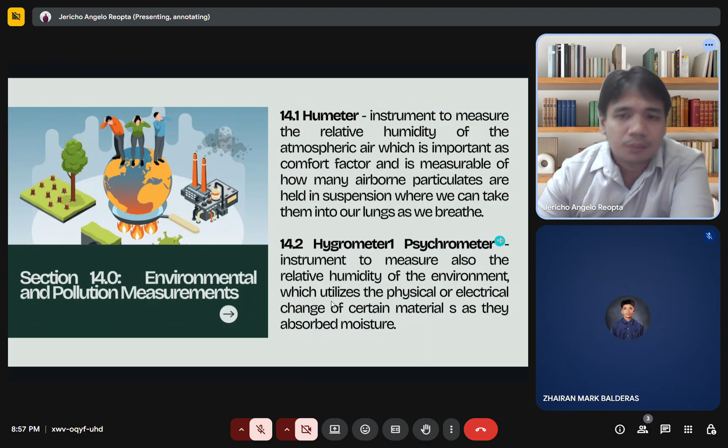Hygrometer, psychrometer, instrument to measure also the relative humidity of the environment.

Next, provisions of hygrometers in all departments of cotton spinning and weaving mills wherein artificial humidification is adopted. Hygrometers shall be provided and maintained in such positions as are approved by the engineer.

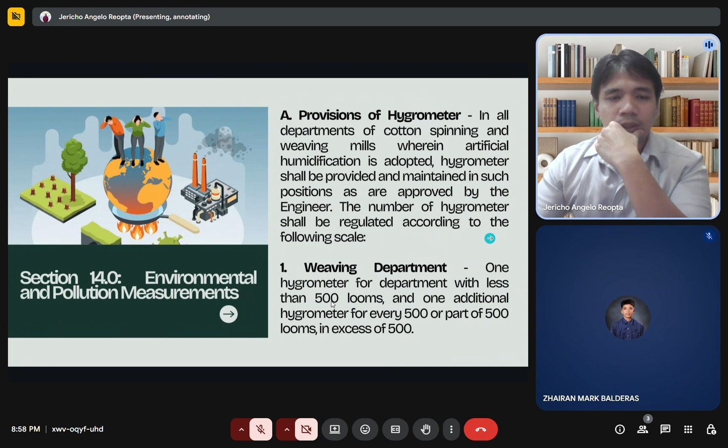Weaving department: 1 hygrometer per department with less than 500 looms, and 1 additional hygrometer for every 500 or part of 500 looms in excess of 500.

Other departments: 1 hygrometer for each room of less than 8,500 cubic meters capacity, with 1 extra hygrometer for each 5,600 cubic meters or part in excess of this.

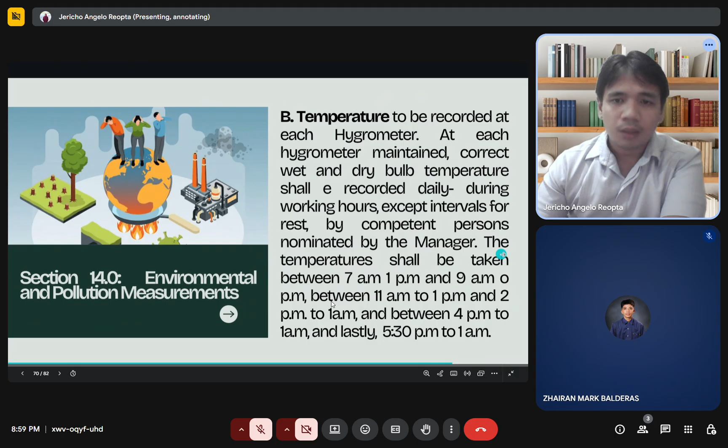Temperature is to be recorded at each hygrometer. The correct wet and dry bulb temperature shall be recorded daily during working hours, except rest intervals, by competent persons nominated by the manager.

Specification of hygrometer: each hygrometer shall comprise 2 mercurial thermometers, wet and dry bulb, of similar construction and equal in dimension, scale, and divisions of scale.

The wet bulb shall be closely covered with a single layer of muslin kept wet by means of a wick attached to it and dipping into the water in the reservoir.

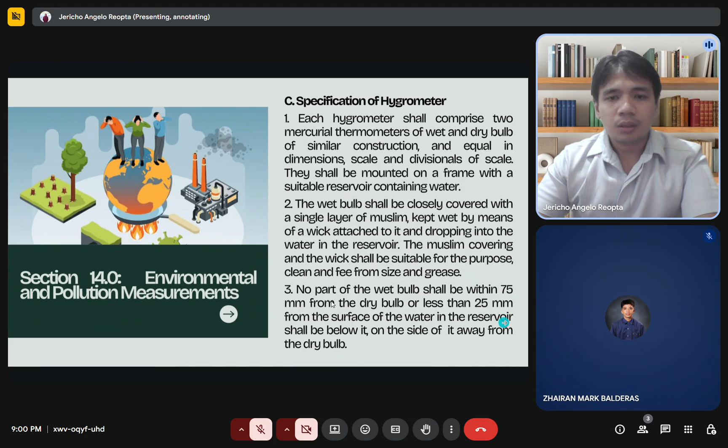No part of the wet bulb shall be within 75 mm from the dry bulb, or less than 25 mm from the surface of the water in the reservoir, and the reservoir shall be below it.

The bulb shall be spherical and of suitable dimension, freely exposed on all sides to the air of the room. The bore of the stem shall be clearly distinguishable at a distance of 60 cm.

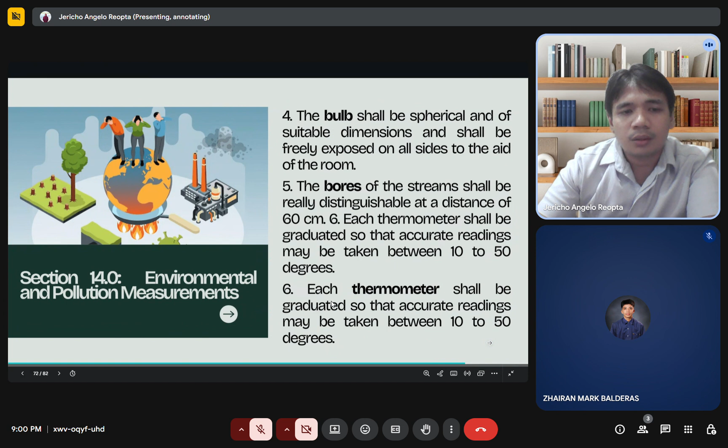Each thermometer shall be graduated so that accurate readings may be taken between 10 to 50 degrees. Every degree from 10 up to 50 degrees shall be clearly marked by horizontal lines on the stem.

Each 5th and 10th degree shall be marked by longer marks than the intermediate marks, opposite each 5th degree. For example: 10, 15, 20, 25, 30, 35, 40, and so on.

The marking as above shall be accurate; that is to say, at no temperature between 10 and 50 degrees shall the indicated reading be in error by more than 2/10 of a degree. Every degree from 10 up to 50 shall be clearly marked by horizontal lines on the stem.

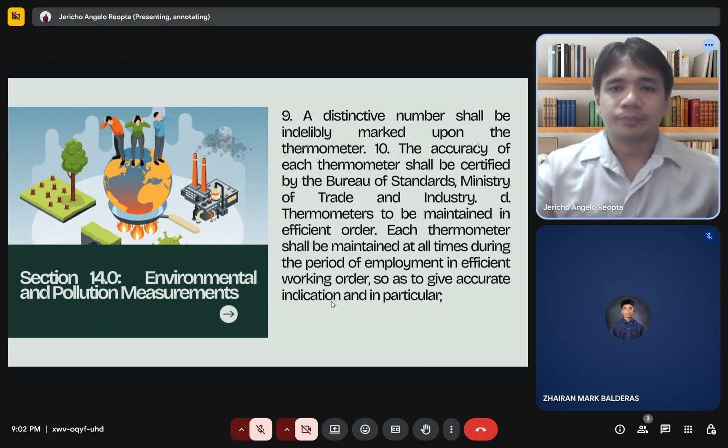A distinctive number shall be indelibly marked upon the thermometer. The accuracy of each thermometer shall be certified by the Bureau of Standards, Ministry of Trade and Industry.

The wick and the muslin covering the wet bulb shall be renewed once a week. The reservoir shall be filled with water which shall be completely renewed once a day.

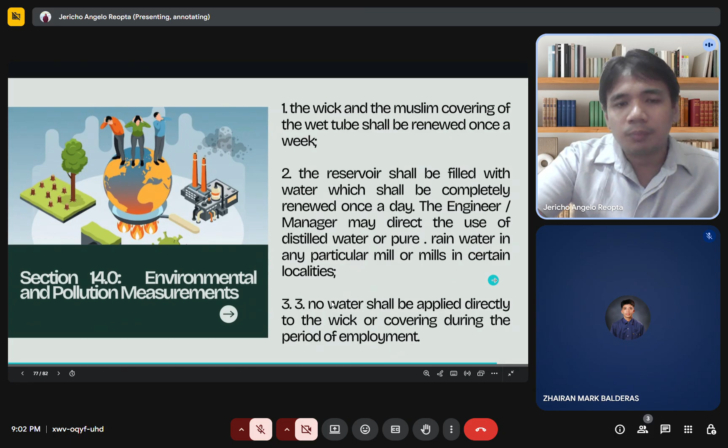The engineer or manager may direct the use of distilled water or pure rainwater in particular mills or in certain localities. No water shall be applied directly to the wick or covering during the period of employment.

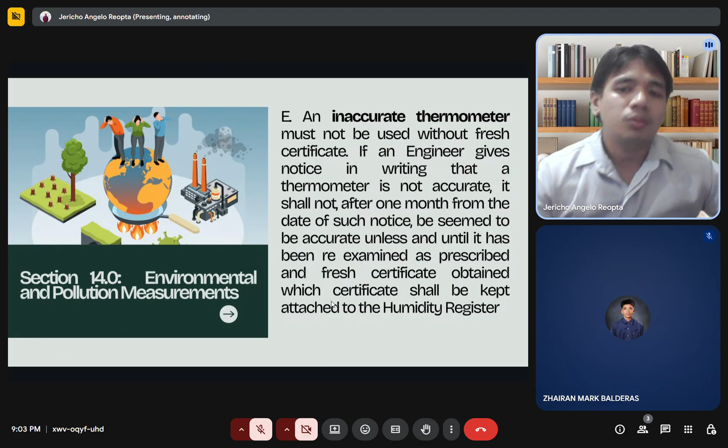An inaccurate thermometer must not be used without a fresh certificate. If an engineer gives notice in writing that a thermometer is not accurate, it shall not, after 1 month from the date of such notice, be deemed accurate unless and until it has been re-examined and a fresh certificate obtained, which certificate shall be kept attached to the humidity register.

A hygrometer is not to be fixed to a wall unless protected by wood. No hygrometer shall be fixed to a wall, pillar, or other surface unless protected by wood or other non-conducting material at least 12.7 mm in thickness, and distant at least 25.4 mm from the bulb of each thermometer.

No hygrometer shall be fixed at a height of more than 1,700 millimeters from the floor to the top of the thermometer stem, or in the direct draughts from a fan, window, or ventilating opening.

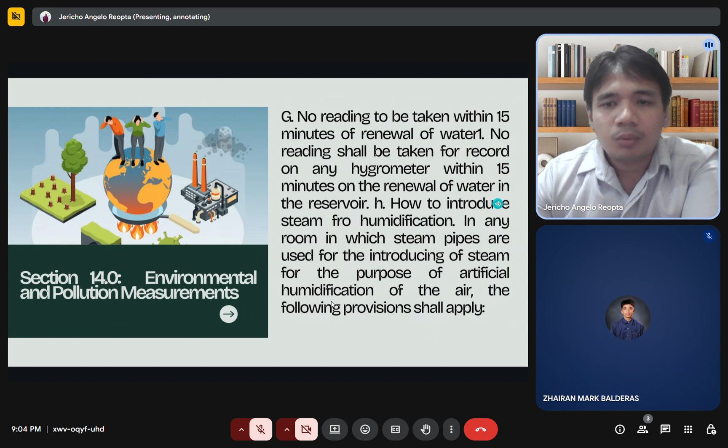No reading is to be taken within 15 minutes of renewal of water. No reading shall be taken for record on any hygrometer within 15 minutes of the renewal of water in the reservoir. This applies to the introduction of steam for humidification in any room in which steam pipes are used for the purpose of artificial humidification of the air.

For the purpose of artificial humidification of the air, the following provisions shall apply.

The diameter of such pipes shall not exceed 25 mm. Such pipes shall be as short as is reasonably practicable. All hangers supporting such pipes shall be separated from the bare pipes by an efficient insulator not less than 15 mm in thickness.

No uncovered jet from such pipes shall project more than 100 mm beyond the outer surface of any cover. The steam pressure shall be as low as practicable.

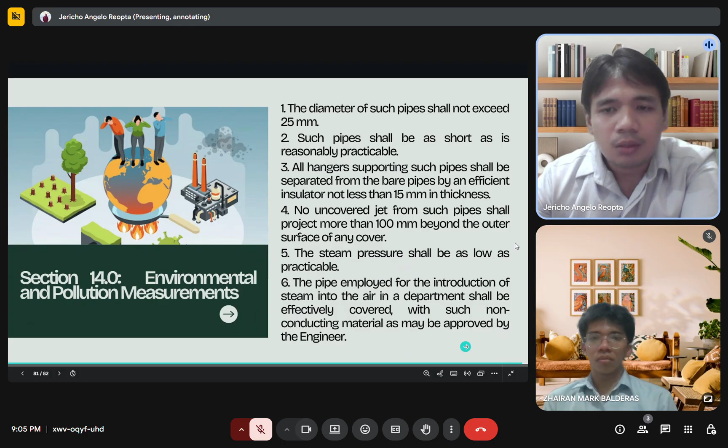The pipe employed for the introduction of steam into the air in a department shall be effectively covered with such non-conducting material as may be approved by the engineer.